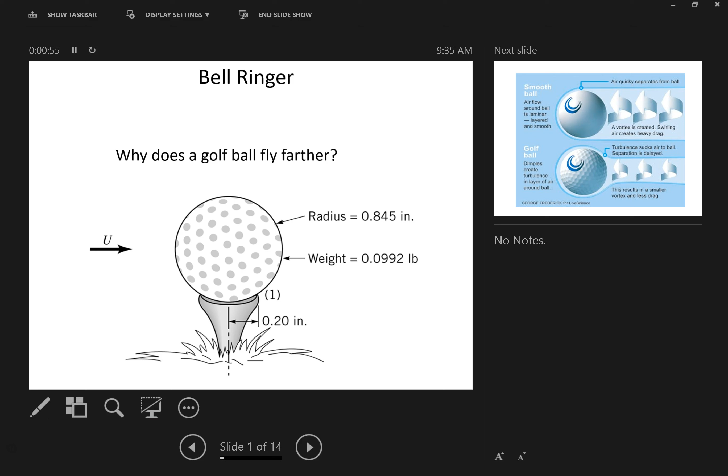Okay, what about if I drew the streamlines, if this ball was moving this way? There's not like many stagnation points, and there's less thickness behind it. You're getting in the right direction. When the dimples are there, the flow comes back closer, it doesn't create this big wake back here. It creates a smaller wake with the dimples, okay? We'll go through some of that.

Here's kind of a why. Here's a smooth ball, you get this big wake. Here's this golf ball, which has dimples, and you get this smaller wake. You still get drag, but it's reduced because it creates turbulence back here and it starts spinning. Think of it like arms, they're grabbing that and bringing it back down. Same here, they're grabbing this and bringing it towards the center. That's what the circulations actually help do.

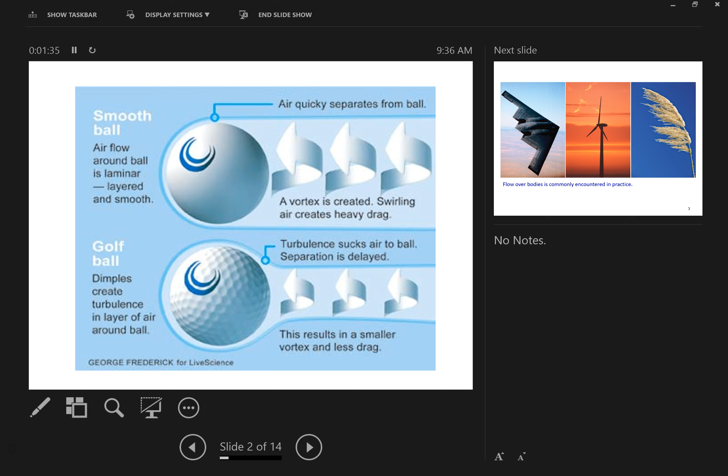So that's why, it's pretty cool. I think Mythbusters actually did it, they did dimples on a car and tested it. I don't know the results. Did you know the results? Positive results? It worked? It was good, plausible. Okay, good.

So what we're going to start talking about is flow over bodies, the complete entire flow. Like previously we've been looking at a hose where we know the diameter shooting out and maybe hitting something, where we did linear momentum. Now the flow is so much larger and it goes over the object. We're going to look at airplanes, turbines, and different kinds of shapes, sailboats, submarines, planes. We'll talk about how birds and whales have eyes in a certain location so it doesn't get blurry, like I mentioned before. We'll talk about all that stuff.

This is some of the stuff that hopefully I'll hear about within this week or next week, about the campus enhancement to build those small wind tunnels.

This is something we can now see as external flow, a flow visualization you learned about using smoke or whatever. So now you'll be able to understand where drag comes in and how to improve it.

I should check, I think Mr. Baldwin might have one of these. It'd be pretty cool to take that, maybe do it for Engineers Week if we have one. If he has one, that'd be sweet to do next semester and show kids—take it out here, block off a section in the driveway, have some lights on it, shoot it across. That'd be cool.

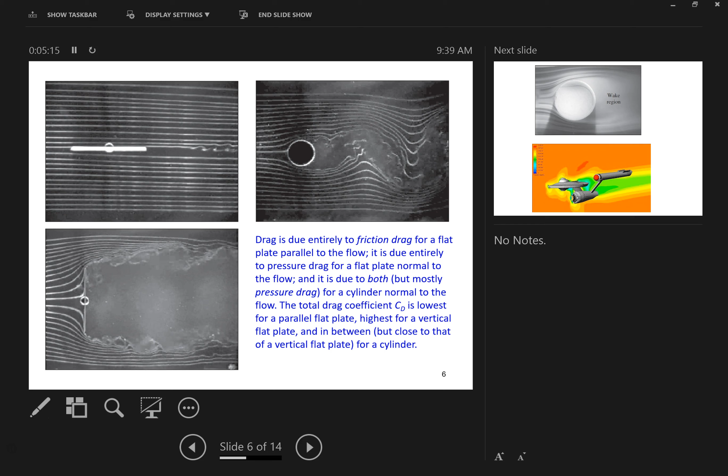We're going to get into more detail on these coming up, but I'll go through some of this and then we'll get back into notes.

So here we talked about this as just a regular tennis ball—you got wake regions. But someone actually drew up the Enterprise, put that in ANSYS, and did a computational fluid dynamics analysis. No, I don't think they did.

Can't read that—they might have. I have to check to see their results. They could have, but I don't know how accurate that would be in ANSYS or Inventor. I'm not sure, but this is some of the stuff that I want you to start doing.

So in this next homework that I just posted, you're going to pick a tutorial, and I give you a list of them. You can either do it in ANSYS or Inventor.

Doesn't matter to me—either you could do something like this, where you put an object in a wind tunnel, or more like homework 1, where it was a pipe flow. So it's up to you what you want to do for that, just to get you more familiarized with the software and what CFD can actually do for you.

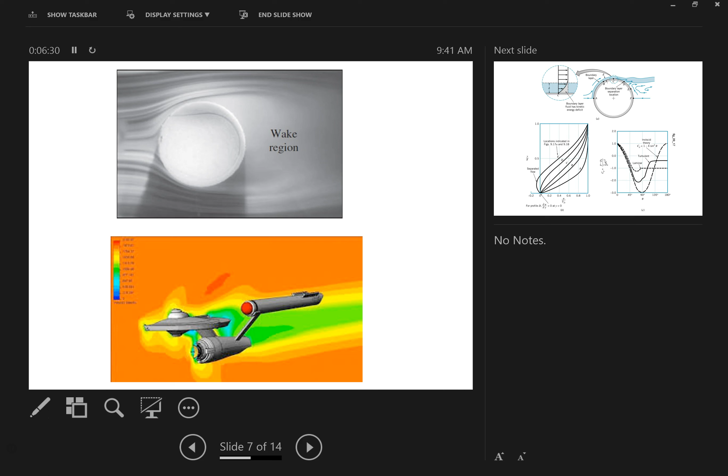Sure, I can talk about this and we'll get back to it. Any questions so far? I haven't given you any equations yet.

Let's look at this top picture. Anytime I'm walking or moving in air, moving in any fluid, there's always going to be a boundary layer, meaning the fluid sticks to my surface. So as I'm walking, past my arm here, the velocity of the air right on my skin is 0 because it's sticking to me, because my arm is not moving back and forth. Away from that, the air is moving at whatever speed I'm moving at.

So if an airplane's flying through the air, it has a boundary layer, and it grows as it goes past, toward the back end of the airplane. I'll show you, and we'll draw some sketches here. There's going to be a certain point where this fluid goes around and basically sticks to the surface, but it gets to a point where it can't really stick anymore, and it becomes unattached or detached from the surface.

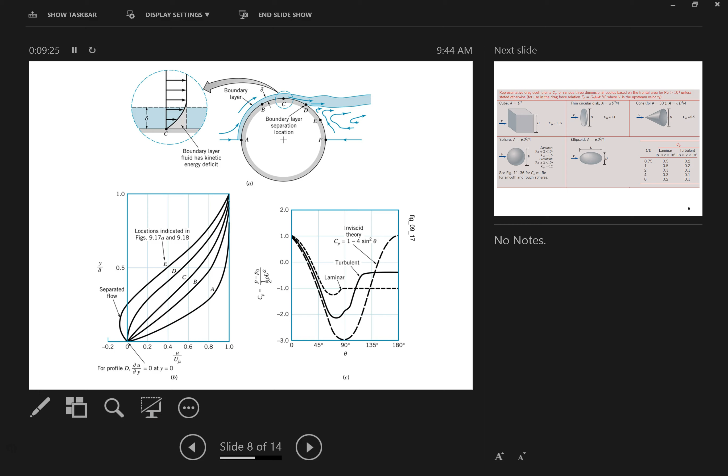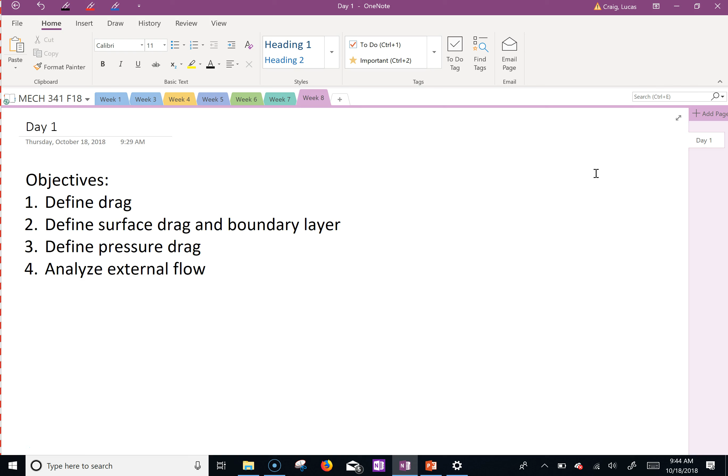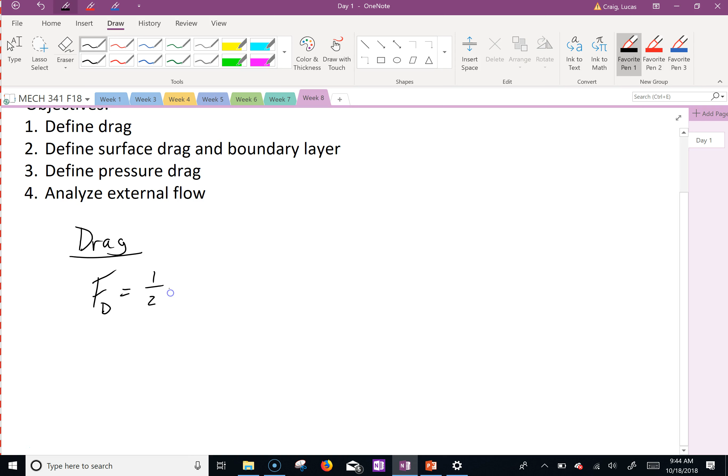So let's stop here and take some notes now so you can understand where drag comes from and some equations. Okay, so drag: the drag force for us is 1/2 rho v squared CD times A.

And this is actually for Reynolds number much greater than 1. Do you remember what the Reynolds number equation was and what two forces it related?

It's rho V L, some characteristic length, over mu. And this compared—what is velocity in terms of energy? Kinetic or inertia, so it's moving, over mu, which is viscosity, which relates to friction forces. So it's inertia over your friction force. That's kind of what it relates.

So for us, large Reynolds number has a lot of inertia. We have a lot of mass, and as we move with acceleration, that term is huge compared to the viscous force in air. If we were moving in something like honey, that equation is no longer valid because the viscous force is now much greater. Or if you have a steel ball dropped in oil, there's a different equation.

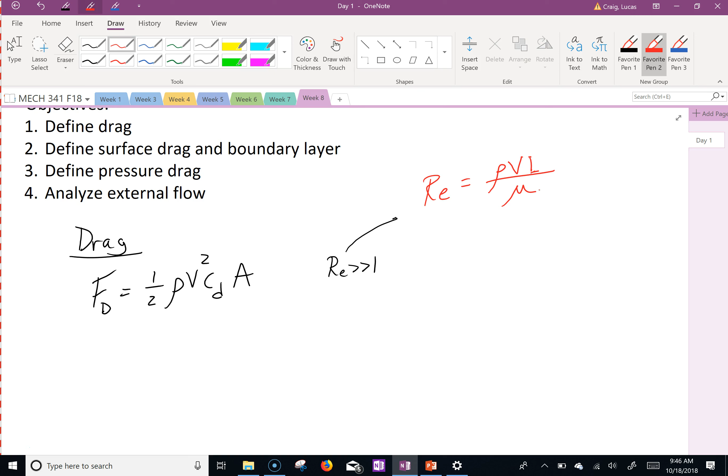And that equation, if you want to write it down—I don't have it in my notes, but I remember it's 3 pi mu V times D, actually over CC, and I'll talk about what that is. This is for when the Reynolds number is less than 1.

How many orders of magnitude are we talking for 'much greater'? For this, we could probably just say less than 1. The Reynolds number you're going to see is probably usually always over 100 to 1,000. These are like around 1 or lower, significantly lower.

So this drag force is primarily due to viscous forces. This other one, if you notice, is due to inertia or kinetic energy—the top one. So 3 pi mu velocity times diameter, usually some sort of characteristic diameter.

So if you take a pollen particle—they're really small, floating in air, or a dust particle, if you open your window, you ever see that with the dust flying through the sun? Those use that equation because they're really, really small and light, but going through air, that force, you'd have to use that. Now the 3 pi mu VD makes sense. This CC is what they call a Cunningham correction factor.

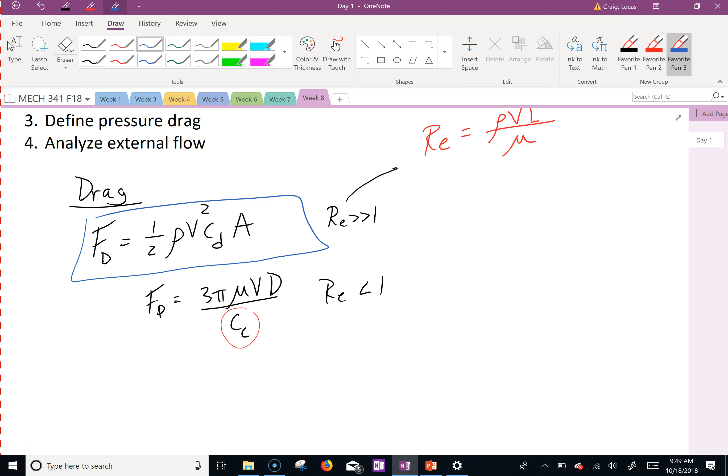For you guys, I wouldn't worry too much about that. It's going to be this one right here. I wanted to let you know there are actually two different types of drag. This one you actually used—remember the falling ball viscometer? That's the equation you used there, because that's how you can find the viscosity of the fluid.

When you did dynamics, or some of you in dynamics now, or even physics, here's a ball, and it gets launched off at some initial velocity, shoots in the air. Do we ever use drag? No, you neglect it. Why? Because it's pretty hard to actually find the velocity squared, since it's nonlinear.

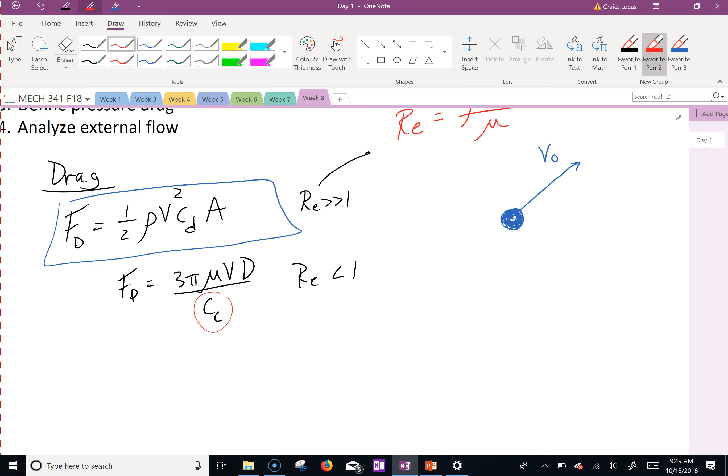But now, say we have a ball, and say it's falling. On your homework problem, I want you to drop a ball from a certain height—you could test this if you want. I want you to plot the terminal velocity, or velocity as a function of time, and you'll actually reach terminal velocity. So if you have a ball that's falling, going down this way, you have weight, and you also now have drag.

So if you sum these forces in the y, equals MAy, with downward as positive, you have W minus FD equals MAy.

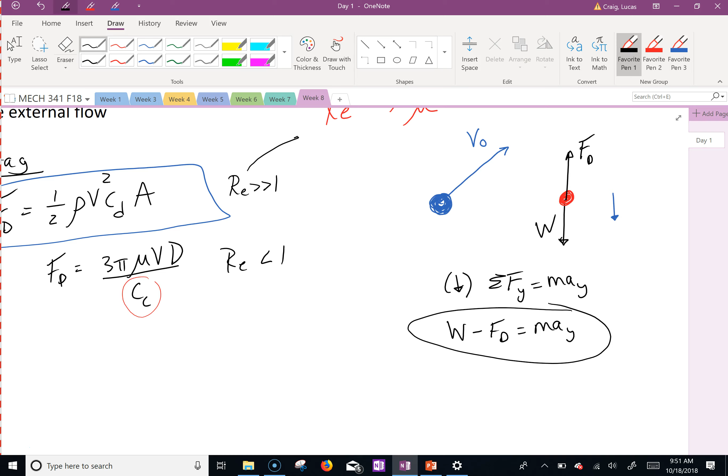So a lot of students—I hope this makes sense—this right here, Newton's second law, is used to find acceleration. If we have drag in there, this isn't 9.81. If you just had weight, like we do in physics, and we sum the forces, it was mg equals ma. What is the acceleration? Gravity. This is what you've always been taught, but it's technically not right, because you have a drag force in there that we always neglect.

Which, these actually give you pretty close numbers—if you've done experiments, they're pretty close. That's why we teach you that. This is the more correct version. Actually, this isn't correct either.

What are we missing in this one that you can assume neglected in here? We have a ball that's falling. We have gravity, we have drag—that's the drag, the forward resistance. What does that mean? In the front, it's pushing the air out of the way.

That's actually the drag, and I'm going to talk about just that in a sec. Yep, that's included in the drag. So we have a lifting factor to the ball—you could have lift, so it could be spinning. Sure, I didn't think of that, but yeah, it could be spinning, or have some sort of lift, and that could help.

The surface area is included in the drag kind of thing. Buoyancy, yes, buoyancy—there is buoyancy, which we call B. There's lift, it could be spinning. All of that has been neglected.

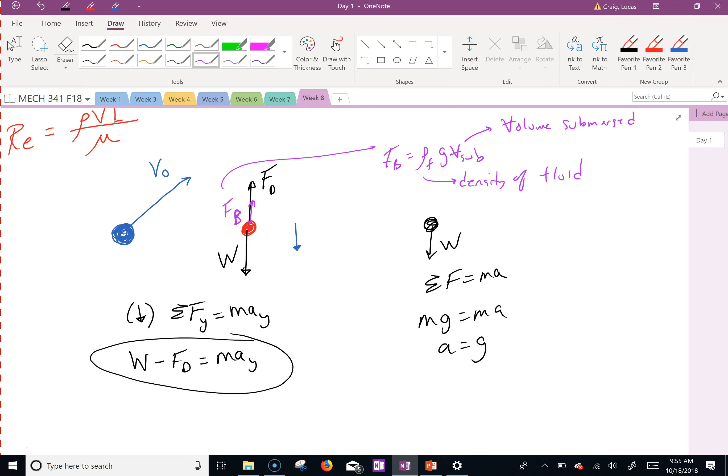Exactly. If I told you don't do this in air, do it in water with a steel ball, you'd have to include buoyancy force. Because yeah, that's 1,000 now instead of 1.176. Yep, you see how you were taught basic stuff, and then now it's like, holy crap, there's a whole new set of forces that I didn't think about, and we get to this.

So, questions? Kind of cool, right? Different things you can look at. Let's just write out this equation right here. So weight is mg minus 1/2 rho v squared CD times A equals m dv dt.

I forgot to tell you, CD is the drag coefficient. Is that usually given? That's either given in tables or you find it experimentally. And that's probably what I'll have you do for the project, is stick different objects in there and actually find the drag coefficient. You just put that in there and put force. Yes, so you have to know, you have to have a force or drag measurement in order to get that. Yep, those are all found experimentally.

Yep, this is, I believe, the frontal area. It's not the surface area, it's the frontal area. And then acceleration, I just called dv dt.

So what did I do? What did I just do here? I created not really a formula, but more of a... what, in this equation here, what would we solve for? Which equation? This one boxed in red. Some of that. V. We're solving for V, okay, as a function of time. So what is that called? A whole class dedicated on it. Differential equation. So this is a differential equation.

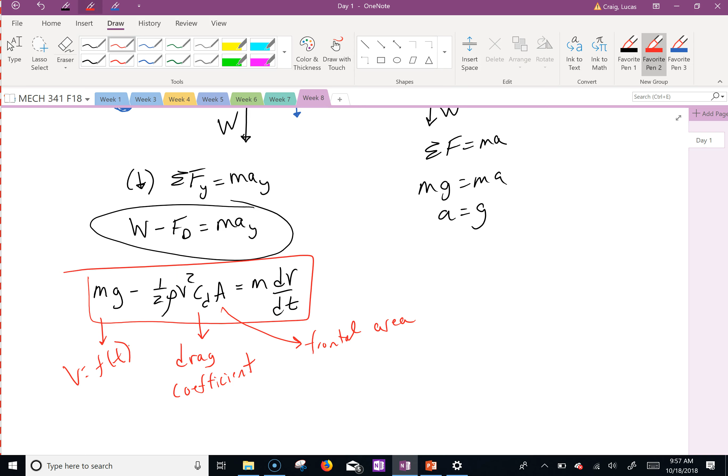Okay, can you classify this for me? First order. So let me write it in terms of what you probably have seen. Oh, that's a plus sign. Oh, man. And it's all divided by m equals g.

So it's first order, constant coefficients, meaning everything in front of your derivative or your velocity are all constants. So density is constant, CD is constant, A is constant, M. But it's non-homogeneous because it's equal to G, because G doesn't have a derivative or a velocity. And it's linear or nonlinear? Nonlinear, because it's power of 2.

Now there is methods to solve this by hand, but it's tricky. You don't want to because it's a pain. What I'm going to show you, probably not this class, but next class, is how we use MATLAB or other codes to solve for this numerically. So that's one of the homework problems, is going to have you solve this numerically. Then you could solve any differential equations the exact same way that I'm going to show you how to do it. So once you have that code built, you just pop in that equation there, and boom, you can solve it.

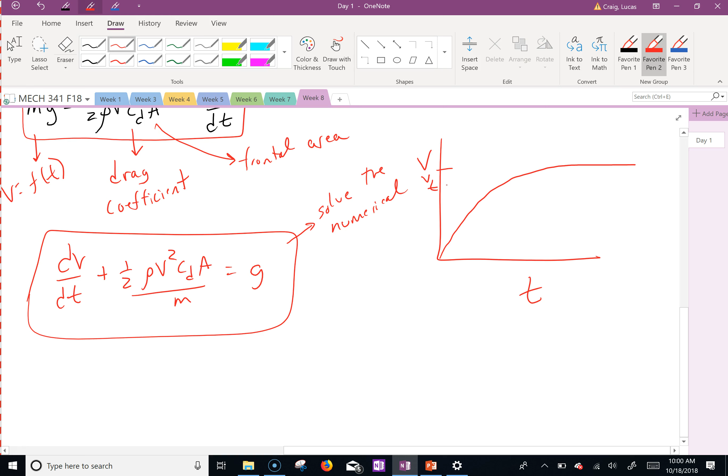So what is this going to look like if you plotted velocity versus time, just to get an idea? Yeah, it's going to start at 0, and eventually it's going to level off, right? And that's your terminal velocity. Assuming positive, right? Because if we're going downward, and you just pick your direction, right?

So let's just see, yeah. Any questions so far before I dig a little deeper? So terminal velocity, we can find that right now. That's when the weight equals FD. Because if those two equal each other, the thing's not accelerating anymore. Okay, so the weight is mg. This is 1/2 rho v squared CD times A.

And the velocity then becomes mg, 2mg divided by rho CdA, square root.

So you have to know your area, depending on which way you're moving. Are you facing this way with the whole area, or are you skydiving straight down? Then you have very minimal area. But based on my analysis, it does depend on the mass, like this.

I think someone did this, in the first or second week of dynamics class. He tested this out and we got the right answer. We just had to figure out this and that. He did a calculation online, and they actually matched. This equation matched the equations or numbers he got from online.

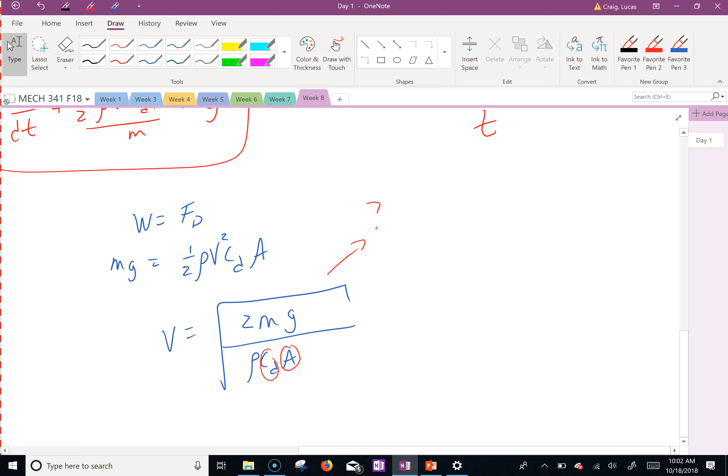Questions so far? Okay, now this is random, but this is good to help you with differential equations. And this may help too with you guys in mechatronics.

So here we have a spring mass system. This is a mass, this is K, and this is X. This mass is attached to a spring, and it's on a frictionless surface. Don't worry about that.

We're going to do a free body diagram on the mass. This is actually like vibrations, which I probably won't teach until the following semester or following year and a half. But that's all right.

If I move this mass to the right a little bit, which way does the spring force want to go? That way, right? Call it Kx.

Okay, Will, you all right? Yeah. Okay, I'm just making sure. You looked like you were thinking about something. Were you thinking about something? Thinking about fluid. Oh, okay. Fluids in the spring? I think just about this class.

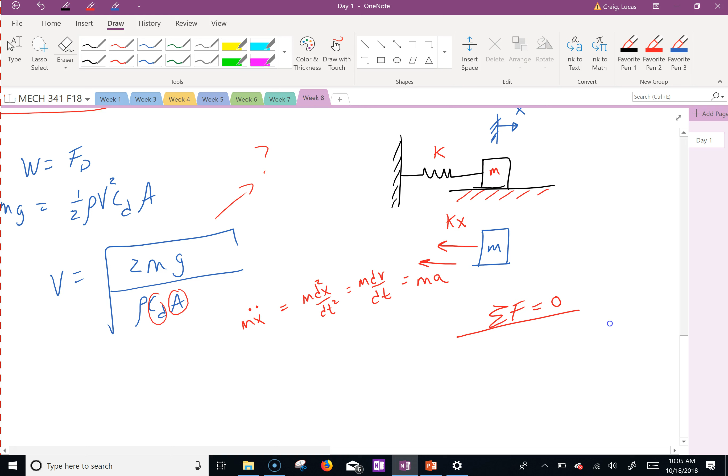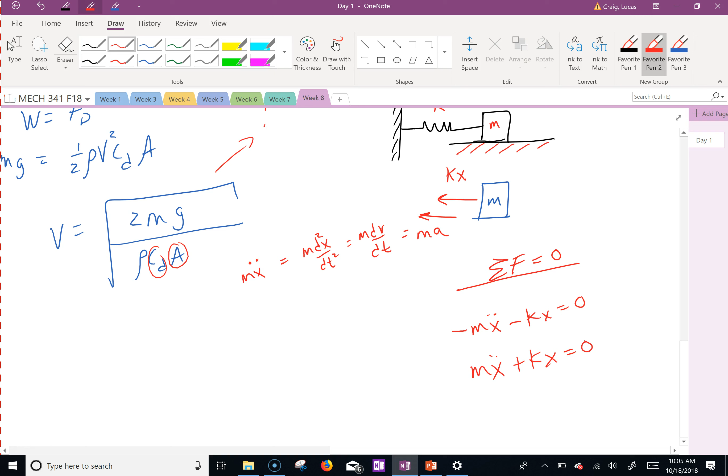If we sum the forces and set them equal to 0 because we threw inertia in there, we got, and I'm going to say it doesn't matter because I'll do this too, minus mx double dot minus kx equals 0, and we have this.

This is where you apply your differential equations. What is a differential equation? All it is, is sum of your forces. That's all a differential equation is, looking at forces. That's it. The tricky part is solving them, right?

This is what you have to classify. What is this? This is second order, homogeneous, constant coefficients, and you can go to a book or whatever, and the solution, or one solution, is written like that. You just find that in a differential equation book. You classify them: second order, constant coefficients, homogeneous. You go to the math book, look up those rules, and it gives you that solution. They have that for thousands of differential equations.

Okay? Does vibrations involve a lot of differential equations? It's only differential equations, pretty much. Yeah, that's pretty much all vibrations is. A 0, or a diameter? That's phi, that's your phase shift. So A is the amplitude.

Omega is actually the frequency at which something's vibrating at, natural frequency. And this is your phase shift, meaning if you plotted it like, not quite, but you know how a sine wave can do this? Well, it might actually start here on the sine wave. Yeah, that's kind of what that is.

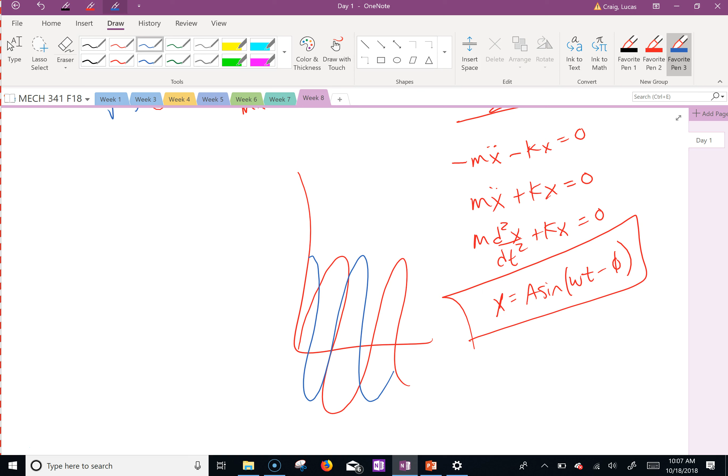So what we do is we do this first. We do that problem to make sure you understand how to do that. Then we add a damper in there. And then we add a force applied to it. Then there's tricks and techniques. If the force is harmonic, like wind usually is, there's a shortcut for that.

I'll show you different ways of how to solve for the damper to get your velocity to dampen out.

So just a little side note, but I hope this helps a little bit with understanding differential equations, what they are, where they come from. The tricky part is then solving them, and that's what differential equations is really for, knowing how to classify them and how to solve them.

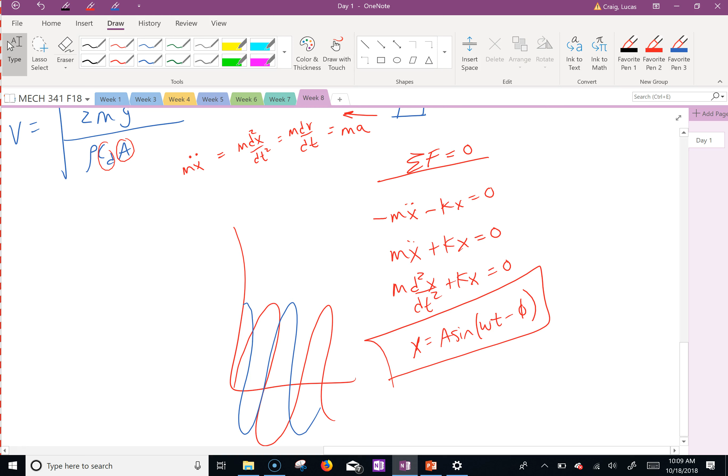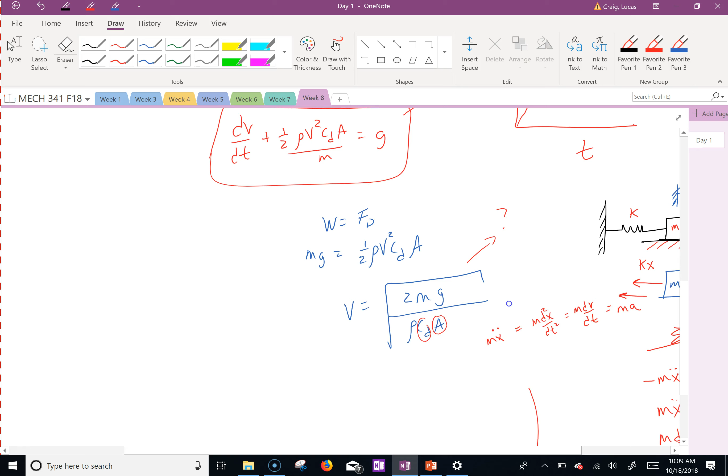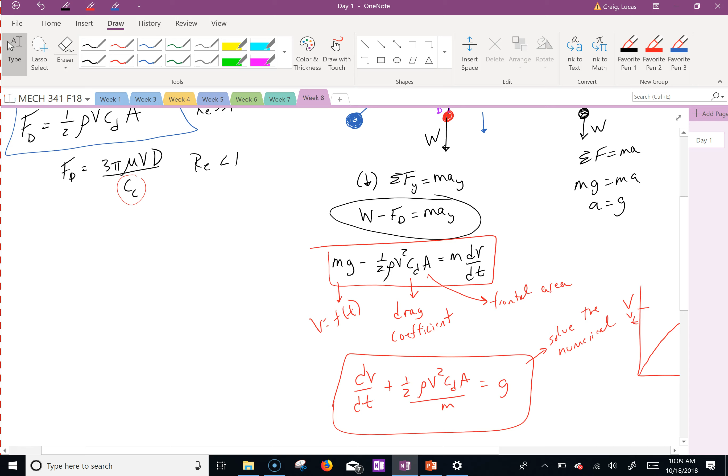This is the first year mechatronics, electromechanical, Mech 128. We covered it, was it with Kanina? No, with Robin. McCullen? Oh, okay, I didn't know that. Yeah, 128 was for Wheatstone stuff. When I taught it, we did electrical first, then mechanical systems, and did enough to get you through. I don't know what it is now. We spent like two weeks on that stuff. I remember doing Wheatstone bridges, that was the biggest thing students had hard issues with.

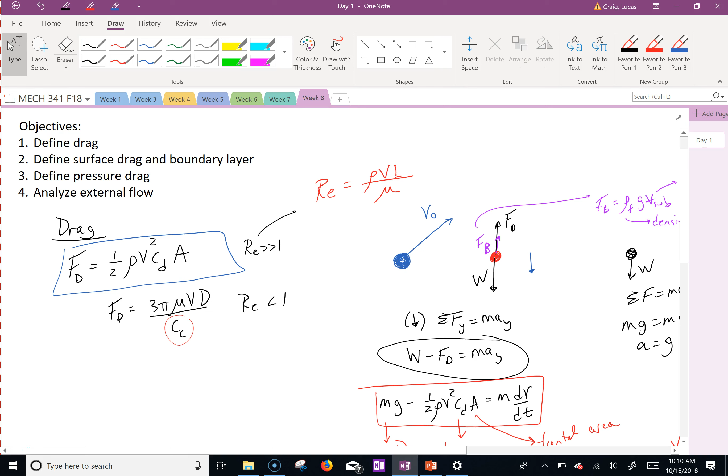Okay, so let's just write this again, or you already have it, but I got sidetracked there for a second.

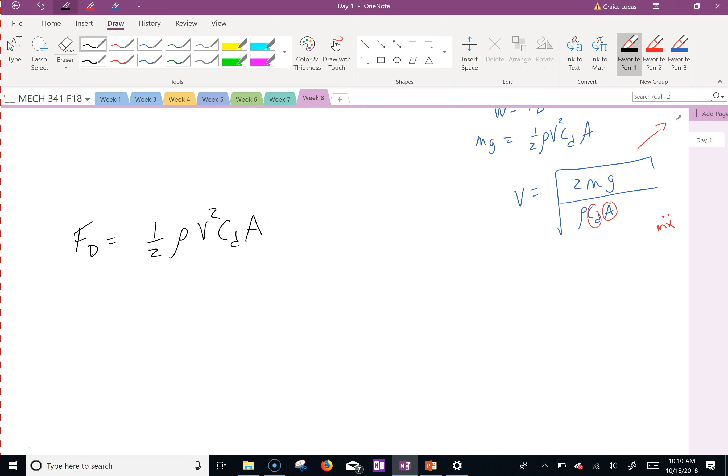All right, let's just kind of quickly talk about where this equation comes from.

So, if you take a cannonball, it has a diameter d, and if this is moving to the right, what does it have to do to this air in front of it? It's got to push out that amount of volume, so this is meters cubed, say in 1 second this thing moves this far, it's got to actually move that much volume out. Does that make sense?

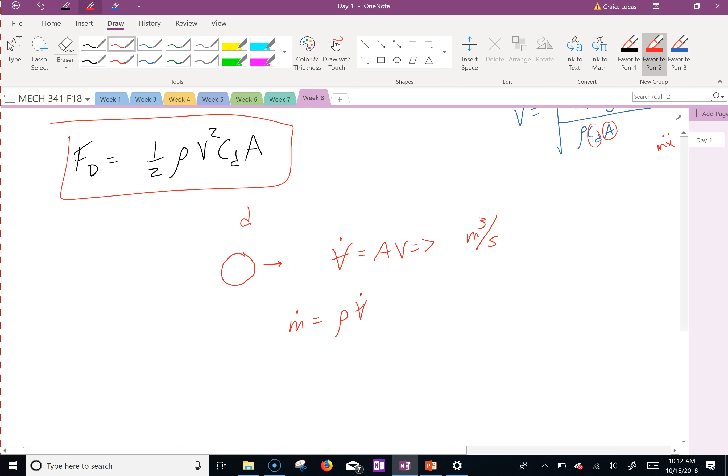Okay, and then how do you find mass flow rate? Yep, it's just rho times V dot. So we have this cannonball moving in air, and say in 1 second it moves so far, but it's got to move that whole volume of air out, and it gets replaced in the back end. Mass flow rate is density times the volumetric flow rate.

Last chapter we knew that if you had flow shooting at you or flow going out, what was the general equation of force for fluid? M dot times v, the right side of Newton's second law was the summation of m dot times v, in and then out. So the general idea is your mass flow rate times v. Let's plug in what we have: m dot, which is rho A v, times v. This is in, so it can just be v squared at that point, right?

Well, what is 1/2 and CD? Those are just constants. When they did these experiments they started with this equation and realized it didn't work, but they found that different shapes were kind of consistent. So this 1/2 times CD is just a correction factor for different shapes. Okay?

The idea comes from understanding a cannonball - it has to somehow displace that much volume per time. And we know from that standard force kind of where that 1/2 rho v squared CD A term comes from. It's kind of cool - it's right in the stuff you've been doing, you just didn't realize it.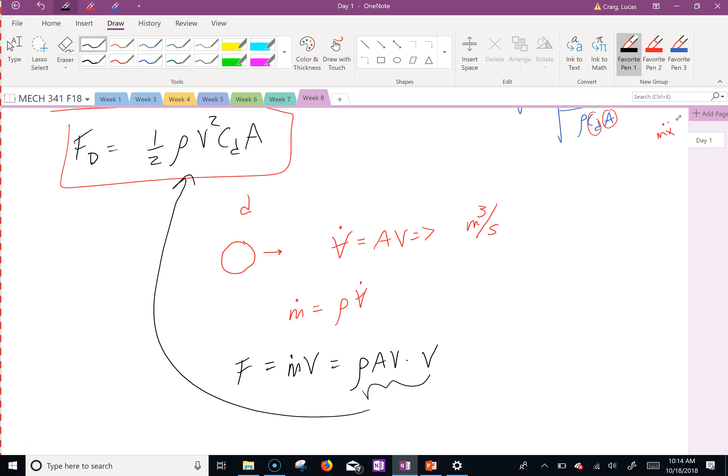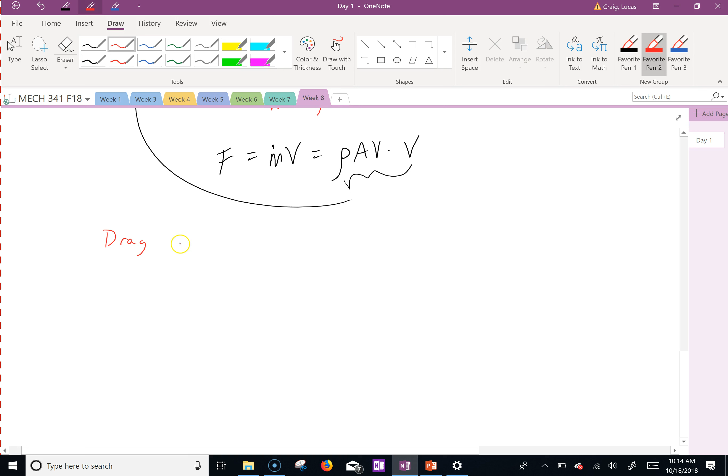Very familiar with the Free Nation of Celestial Space - the guy that claimed all the known universe outside of Earth as his own nation, then waited for the Earth to move out of the volume it occupied and claimed that too, sometime in the 80s. There's some weird people in this world. I never looked into the guy that was gonna shoot his rocket - a steam powered rocket, never actually got approved. He was gonna do it from public land, but the state of Utah rejected it. Then someone with property in Utah accepted it, since he was trying to rocket himself into the stratosphere to take pictures to prove the Earth was flat. Not sure he ever actually did it - inconclusive, no new evidence. Everybody's offering to take him for rides in jets and everything, and he's like, no.

All right, so here's an airfoil, which is part of the wing - this is right up Will's alley. As this is moving this way, it creates drag and lift. We talk about drag and lift acting up: drag acts in the x direction, lift is always in the y direction.

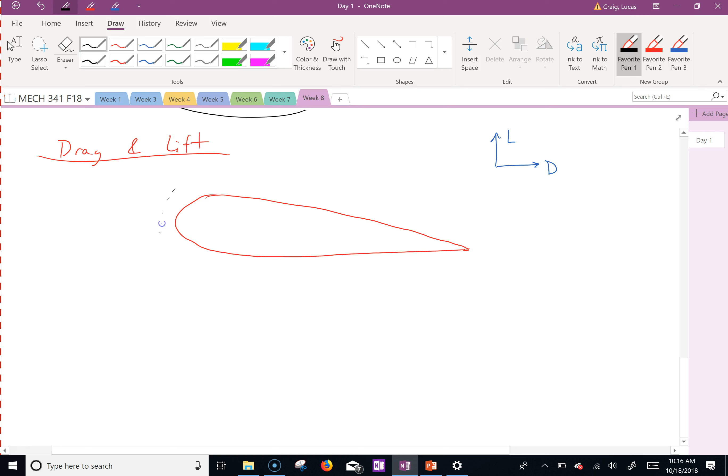As you go around this, let me draw this sketch. This black dotted line is kind of roughly what the pressure distribution would look like if we did a contour map - it would be higher at the bottom because of the shape. That's actually how we get the lift, because you have higher pressure pushing on the bottom compared to lower. What we can do is draw these lines perpendicular to the surface - that's pressure, since pressure acts perpendicular to the surface, normal.

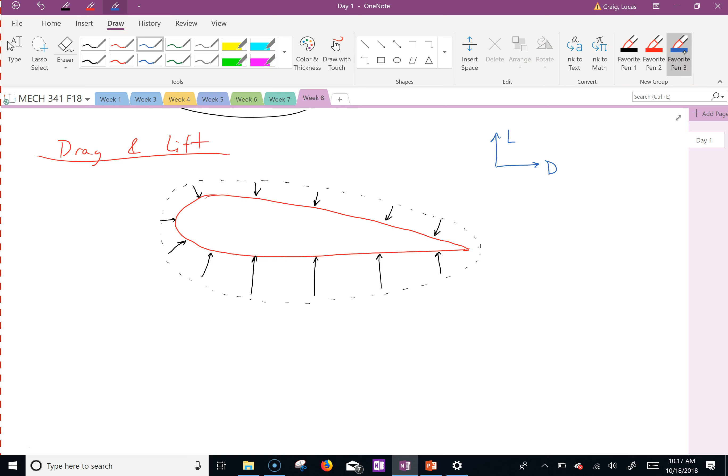I'll do one up front. Then you also have these forces on the surface which are tangent - those are shear forces. The black lines are pressure, and the parallel ones are shear, which you kind of know from strengths or machine design, but those are for solids. This is for fluid now - you still get shear forces and you still get pressure forces.

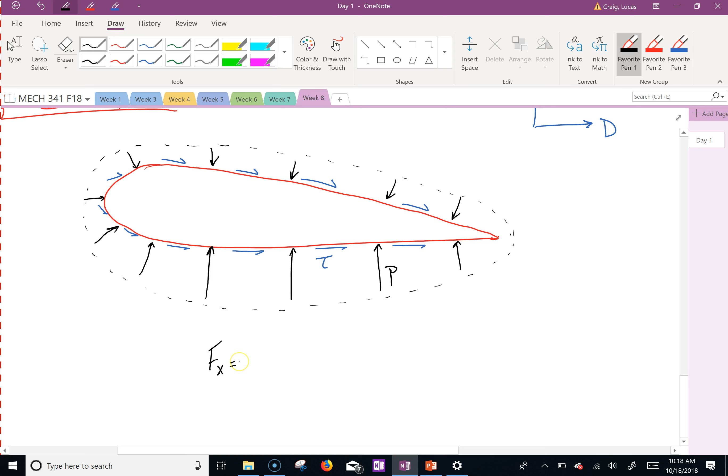So if you actually looked at the x direction, which is your drag force - that's what we got.

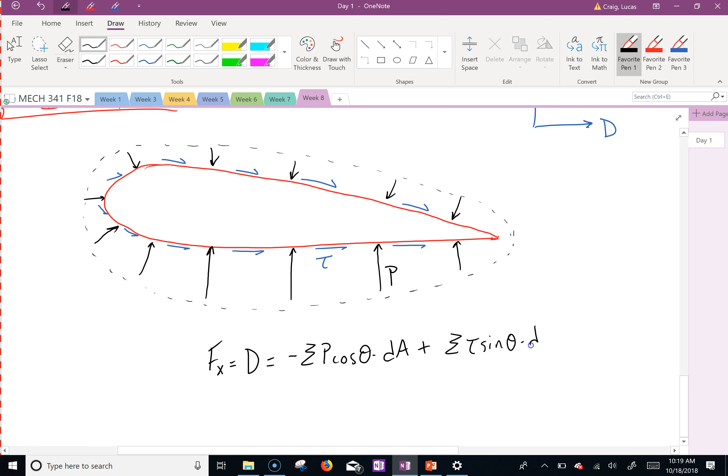So don't worry about these, this is just for you to know. The drag force is in the x direction - it's only the forces in the x. So what you have to do is break out every one of these little forces around the whole thing and only look at the x direction. You'll find that term is actually 1/2 rho v squared CD times A. This you learn if you take an aerodynamics course - you actually dive deep into that. The y direction, which is lift, is basically your y component forces.

Doesn't it offer an aerodynamics course? Nope, that's one that I could teach, but eventually we just kind of didn't do it. But you could take it at Clarkson - if you're getting into fluids, turbines, airplane stuff like this, this is right up your alley.

So for you guys, as long as you understand that the bottom line is drag is only in the x, lift is in the y - those two equations are what you need to know. If you're going to start designing wings and actually making the next airplane, you'd take an aerodynamics course and learn this stuff. But don't worry about that. I just wanted to show you briefly where that part is.

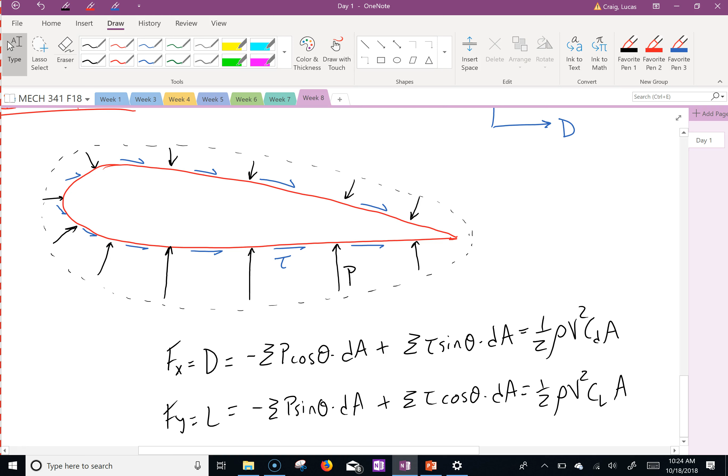All right, so far so good. Kind of random stuff, but it's good. So let's talk about - we talked about drag.

So in your homework problems, a lot of it is - I think one of the homework problems has a stop sign with wind blowing on it, find the drag force, or a moment. It might be even a moment too, I don't know. Actually, there's a truck with wind blowing on the side, and it wants you to find the height or width of the truck so it doesn't tip over. But that uses drag.

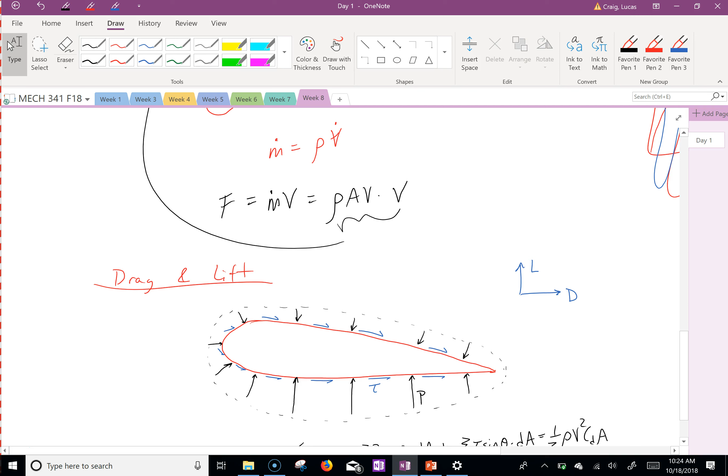There's other parts of the homework that deal with boundary layer. So let's talk about - I think number 1 is boundary layer.

Hey, what about iPhones dying? This is like, as soon as they announced Surface Pro 6, this battery's now been crapping out. I don't know if I can fix it or not - probably not. I thought they put the screen on as a whole piece. Oh, the battery is in there? I would assume, I guess that's gonna work, unless there's screws on that.

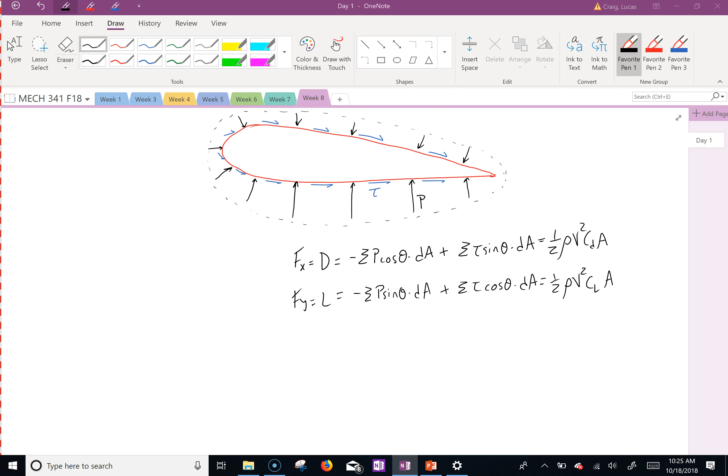Okay, boundary layer.

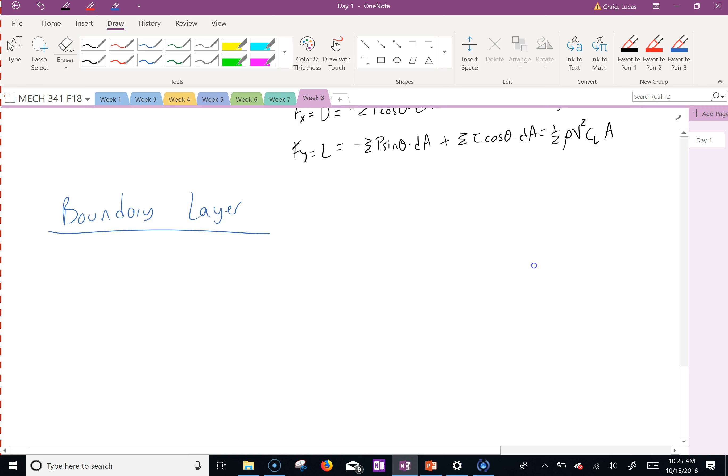Here is a flat plate. Wow, that is not a flat plate. I don't know why I always make it harder for you. Purple flat plate. And we have flow here.

Flow is going to go over this flat plate. Give me an idea what's going to happen near the surface in the front and the back of this plate.

It will eventually, yep, eventually. Might not, because it might just be nice and fine, but it could. If there was a little bump in here, probably, most likely will.

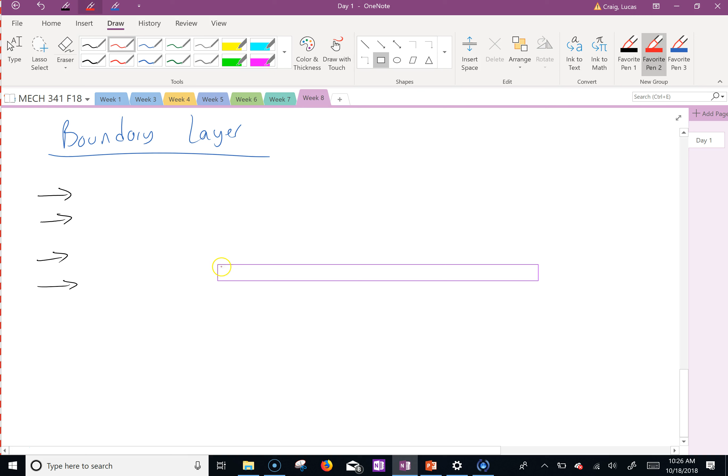What's going to happen is you're going to get a boundary layer that grows. Meaning, if we plotted velocity...

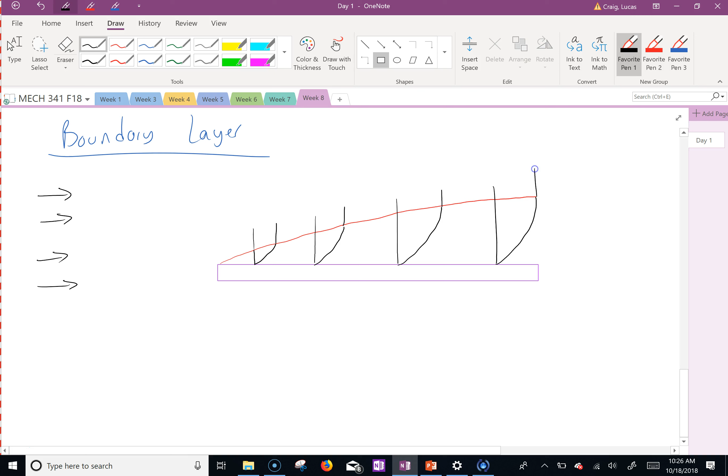Heat transfer, you probably did this. You looked at this, right? Yep. Because you need to know what type of flow you are and where your boundary layers are. Yep, heat transfer did this.

Anywhere from the red down, the velocity is 0 at the surface and increases to pretty much your free-stream velocity, or whatever velocity is upstream, above the red.

What happens is it first touches this, the velocity at the surface is 0. It sticks. And then as it keeps moving down, all this velocity is 0, and it's grabbing more of the molecules above and slowing those down. That's why this grows to the right. All right, does that make sense?

So any object, you're going to get this boundary layer. Now, it's not always this dramatic. Sometimes it's really, really small.

But remember when I was talking about my project that I did for my PhD? I had those inlets on the belly of the plane. I had to make sure that my shape was outside of the boundary layer to capture free stream air. Because if it was in here, I'd be getting a mixture of whatever's in here, and that's not good. You don't want to do that, okay?

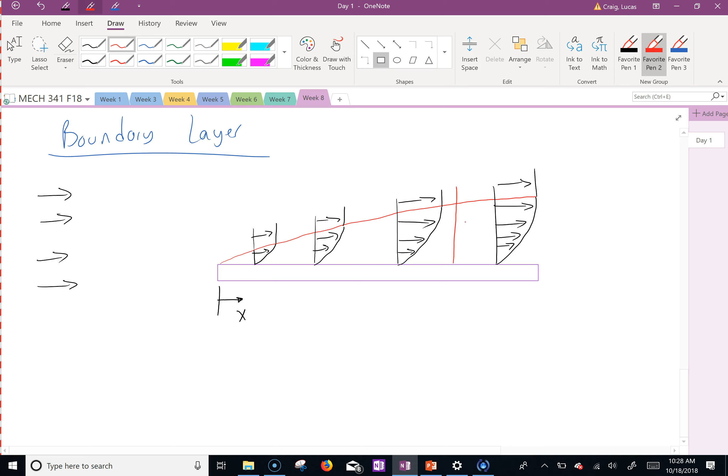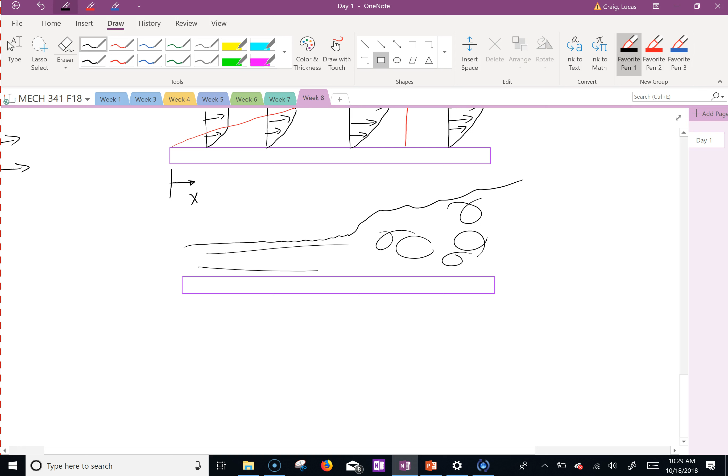So boundary layer grows as the surface gets longer. And sometimes, I'll redraw this down here, sometimes you have nice flow, and then it starts becoming too large and it kind of just slows right down.

And then all of a sudden you get these reverse flows. So this would be laminar flow, and this is turbulent. And that all depends on how fast this air is moving, how long the surface is, and there's examples of how you determine that, and we'll go through that.

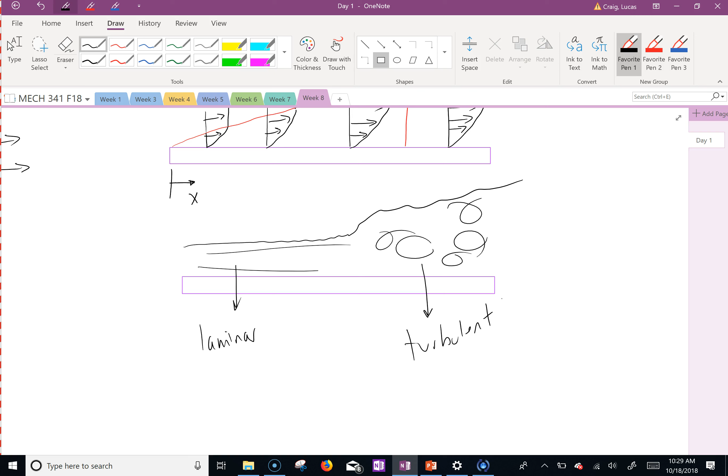Yeah, the boundary layer is not very far. The other thing we had to worry about was location right and left, because if you have an inlet straight ahead of you, you don't want to be measuring in that. So you have to know that wake region.

So we had to figure out, we had to try new spots, and we found one that actually worked right. Yeah, on the belly, yep. We compared it to 2 or 3 that were in the front of the plane, way up top, because you can do it in the top too.

And we compared our measurements, and they were comparable. But when we moved it, it wasn't even getting close, because something upstream was interfering with our measurements.

So boundary layer creates it. It's created, it gets bigger. You could have a laminar, you could have actually here, it's called the transition. And then you have turbulent.

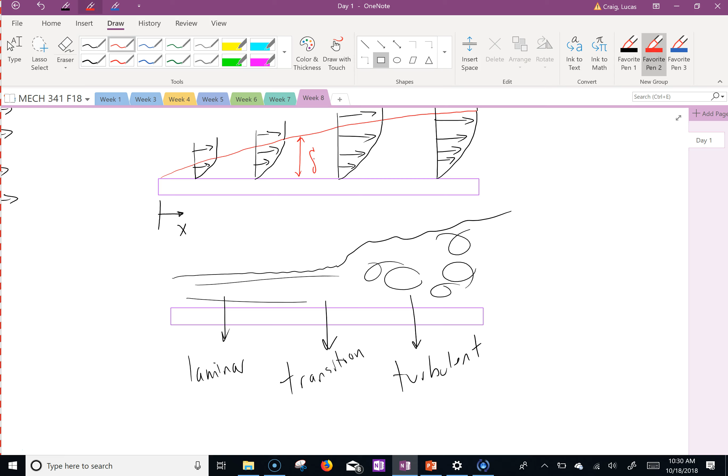So I'll give you these equations here. Draw this on your sketch. This distance is delta up here, the boundary layer. The boundary layer thickness is called delta. I might as well keep that there. And this is how they write it in books.

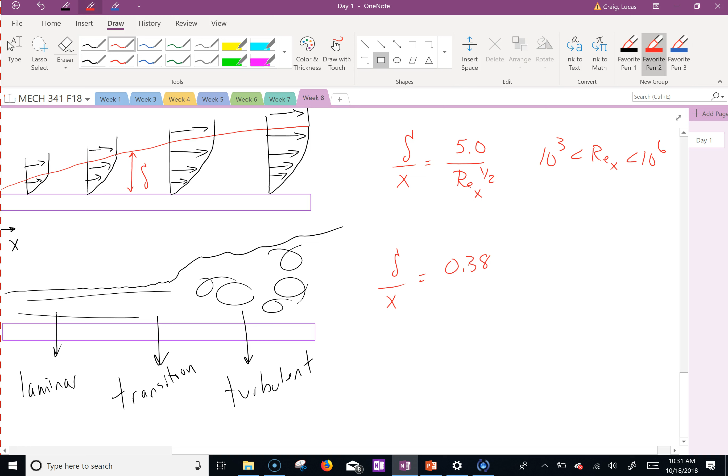This is 10 to the third, less than Reynolds number, less than 10 to the 6. This is Reynolds-X, greater than 10 to the 6.

The students in heat transfer, did you have those? Remember? Okay. Well, you had to find the Reynolds number because you had to determine if it was turbulent or laminar, right, and then use the specific heat transfer equations for that.

What's the purpose of the subscript on the Reynolds number? Is it X, just meaning this is direction of X. Yep, okay. So if you notice, it's due to the fluid properties - density, viscosity, how fast you're moving - and the position you are.

There's going to be times where maybe this is all laminar because it's not moving as fast, for example. Or maybe the first section is laminar, then all of a sudden it becomes turbulent, and you get these circulations created.

The first homework problem has you plot - I want you to plot the boundary layer underneath the kayak. So you have to figure out, is it laminar in this case? Is it turbulent in this case? And figure out what your delta is.

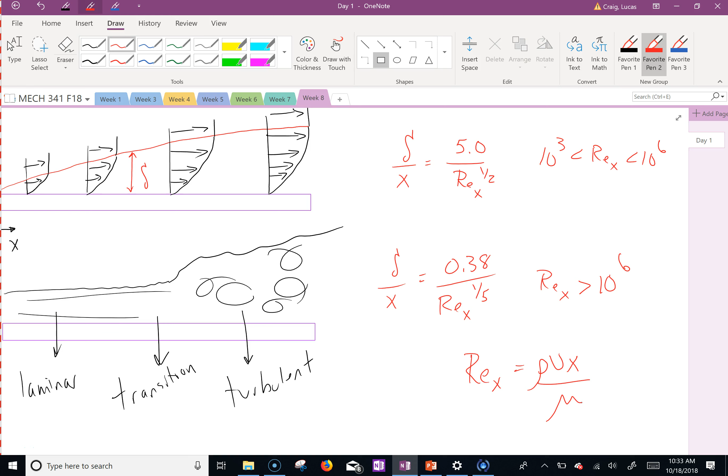Want me to help you with that? Just to give you an idea of the MATLAB code. So let's make X. I don't know the dimensions of that kayak. Actually, I can find out.

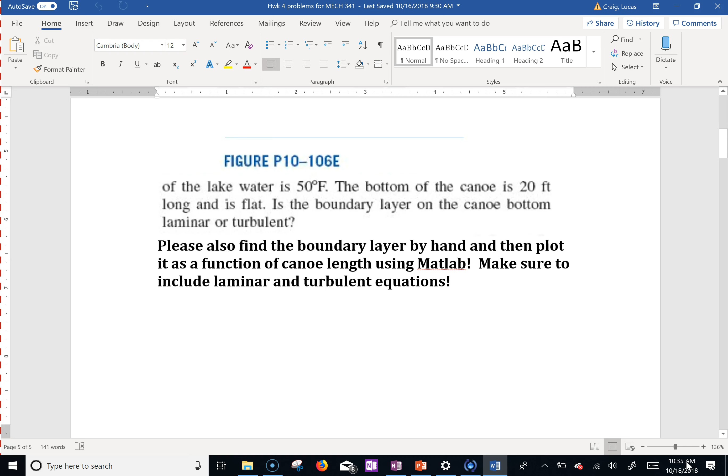All right, so here's the kayak. I'll give you the speed, 3.5 miles per hour. I'll give you the temperature, so you could find density, you can find viscosity. What's that? Canoe. Oh sorry, it's a canoe. Okay.

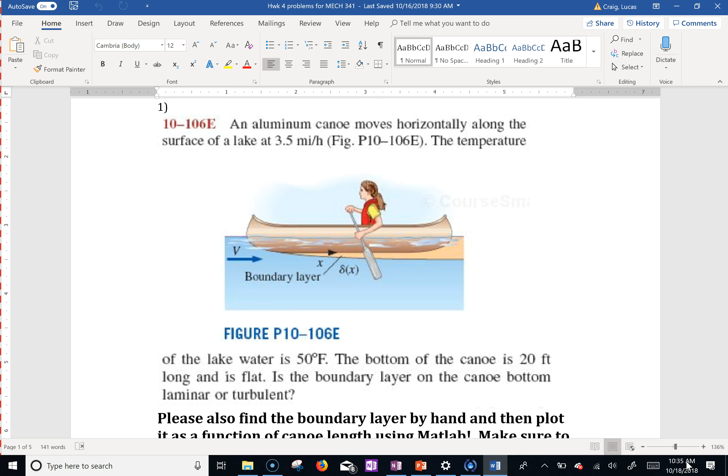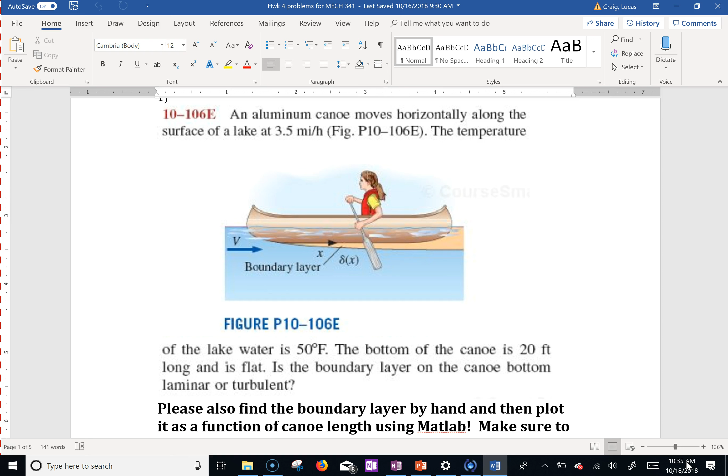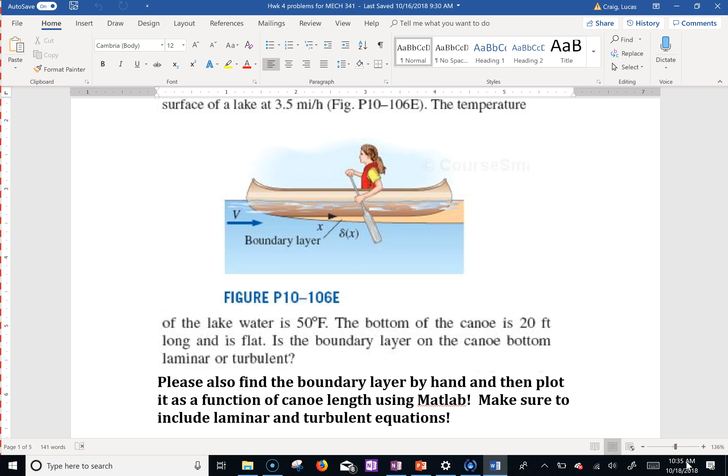I like it, Will. The first question is: the boundary layer in the canoe bottom, laminar or turbulent? So I would say for that one, you're pretty much going to solve it in the plot. What I want you to do is create a code that plots it, but you need to check: is it laminar or turbulent? So it's 20 feet, so X is going to go 0 to 1 to 20.

Okay, now what do we need? We need to define density, mu, v. Say that again? Those are colons, not semicolons.

For each Reynolds number, you need to check, right? So, for I equal 1, the length of REX. What does that mean? Gonna look at the Reynolds number to see what its number is. Yes, so we will get to that. This is just saying that it's going to start with 1 and it's going to go as many times as this matrix is. So what we need to do is we could say if...